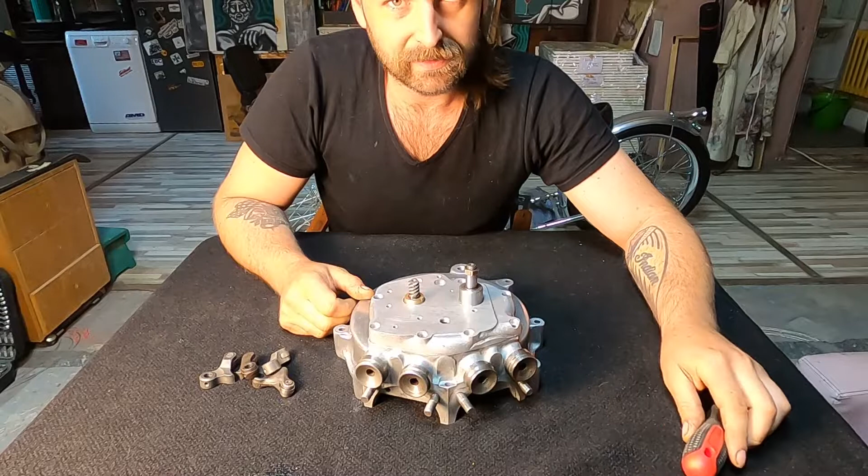Also today I would like to adapt this axle to the newer oil pump. This is for the steel pump. I will have to cut it and make a slot in it, and maybe also drill a ventilation hole, a breather hole in the oil pump. I will time lapse.

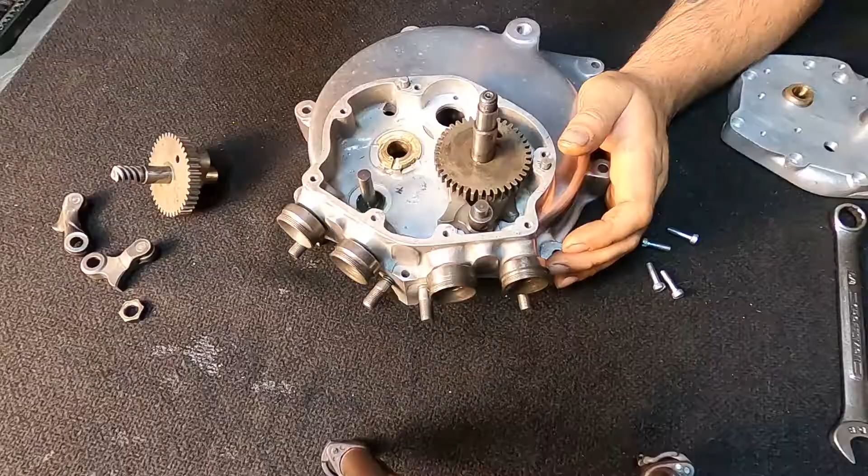So I'm lucky it's only on one side, this problem, so the Bonneville cams are not able to turn the followers. See, they are getting jammed in there, so I will have to roughly grind that out.

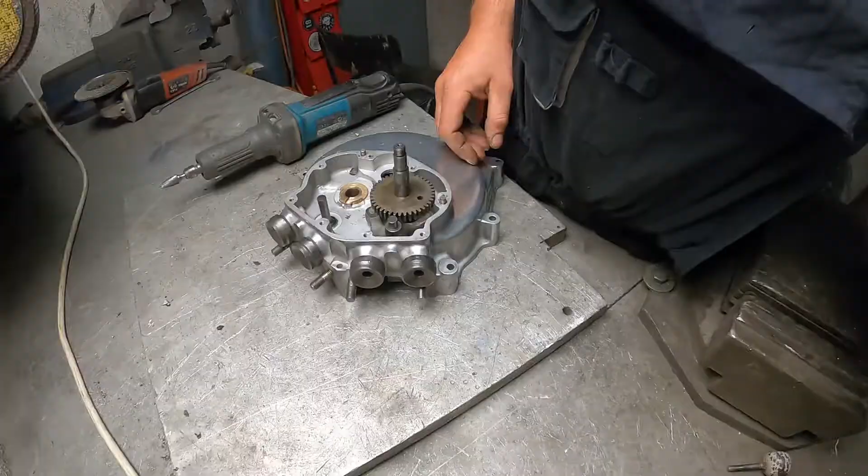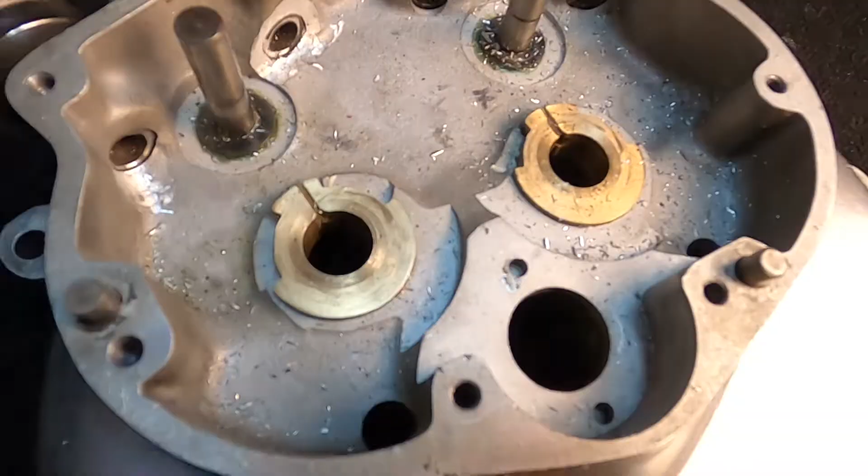Now I'm going to wash the crankcase good and the parts, so I can assemble them.

The valve train is working harmoniously now. Nothing is touching anymore. Maybe I will just take a little bit of extra, so I'm sure nothing will happen, but I will have anyway to finish it up a little bit nicer. I don't like to leave grindings in the crankcase, but for the moment we are good with this.

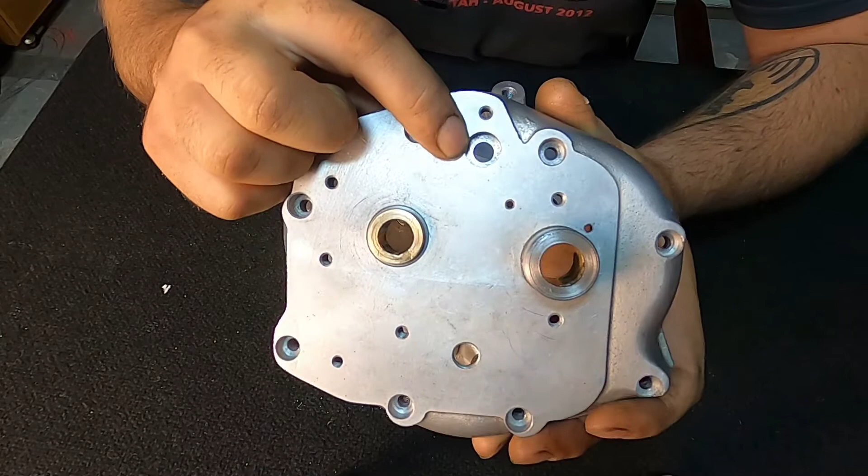I will move on to the other important part. For that I will have to mount the flywheel again to check, because I see this hole is not correct over here, and see what has to be done about it. At least I want to see if it's aligned with the flywheel or not, the little one. If it's not aligned, I will have to make a bushing also, make this one bigger and make them align between themselves. The big hole is for the sealer, oil pressure sealer, and the little hole is for the flywheel shaft to pass. Very important hole for lubing the engine.

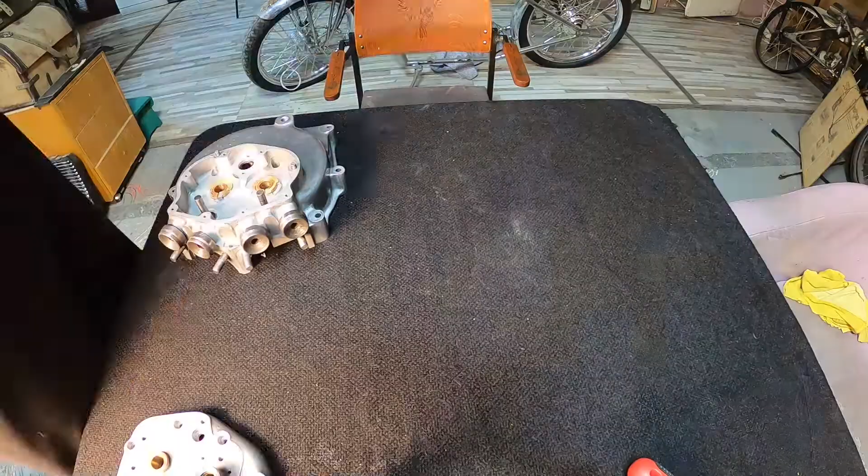So I can check this hole alignment, I have to mount the flywheel in the case, and if I'm here anyway, I want to sort out a little bit the thrust washers for the side spacers of the flywheels. So I will mount the flywheels as correctly as I can in the cases, and then check the timing cover and see where we get.

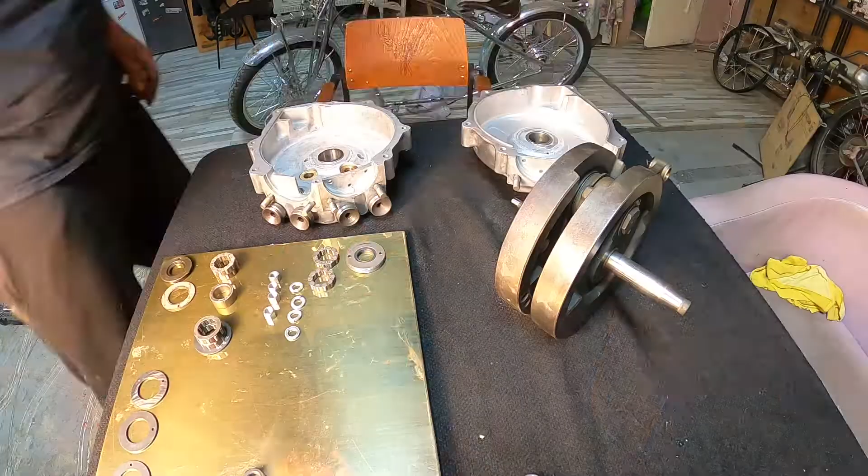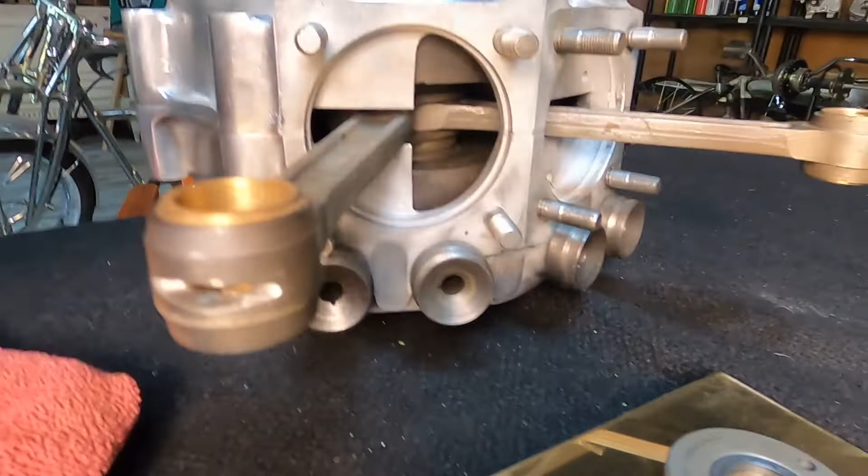When it comes to thrust washers, I prefer not to mount the rollers and first check what I can check, the alignment of the rod in the crankcase. It doesn't seem to be aligned, so it's way to the timing side. I will see if I have a thicker thrust washer and put it there.

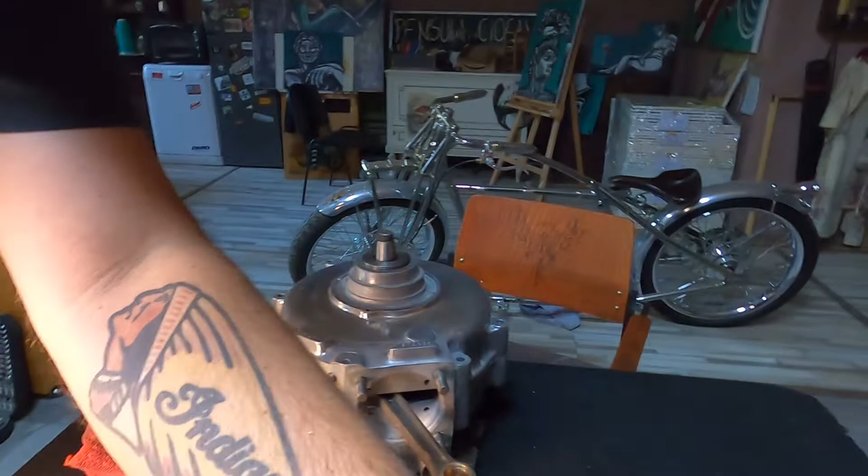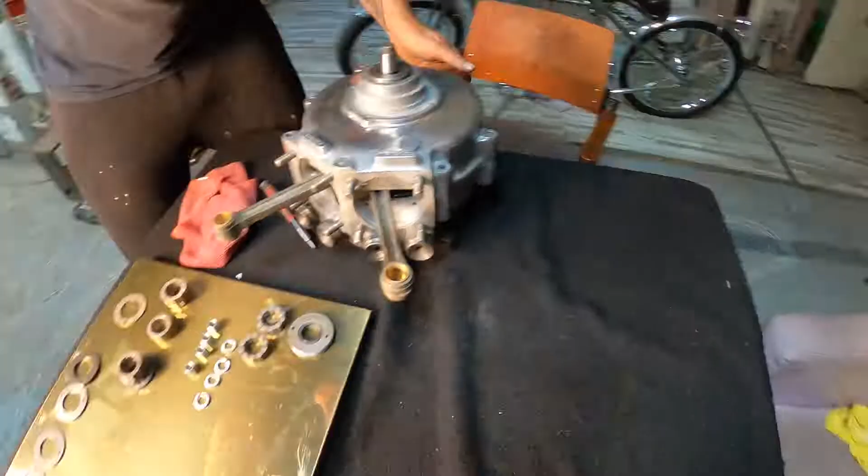I have two types of thrust washers on the timing side. One that is way too thick and the other ones that are way too thin. So what can we do? We take out from the thick one. Now I wanna check how much I have to take out, so I will measure that and see how I will take that out, because they are heat treated.

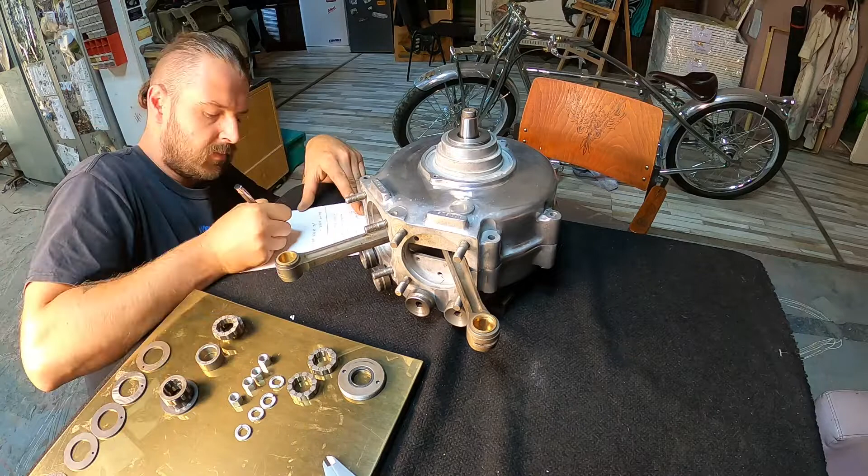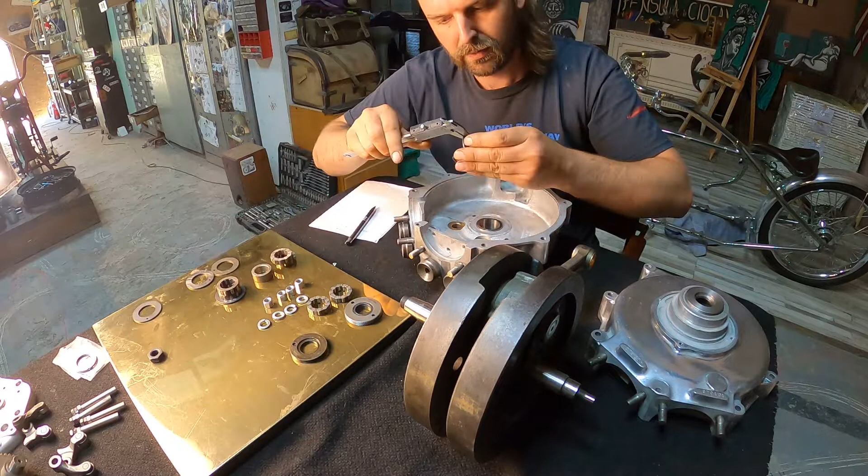So, to determine the exact play I wanna have over there, I was mounting a narrower thrust washer. This is a custom one, I have never seen it before, for the timing side, but it's too thick and I want to know how much to take out of it, because the thickest narrow ones, the stock, will not fit these flywheels. So I chose a middle sized one for the other side. In case I have an error measuring, I can go higher or lower with a little bit.

So now I wanna mount it back together and check without rollers and just check the rough side play that I have.

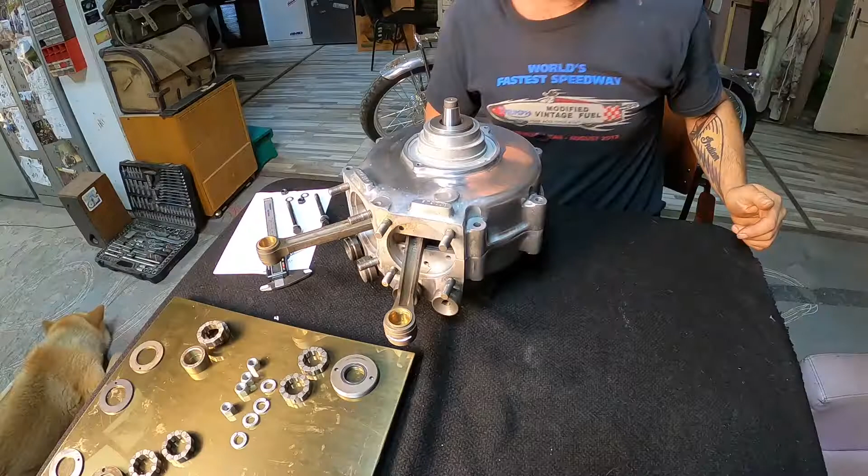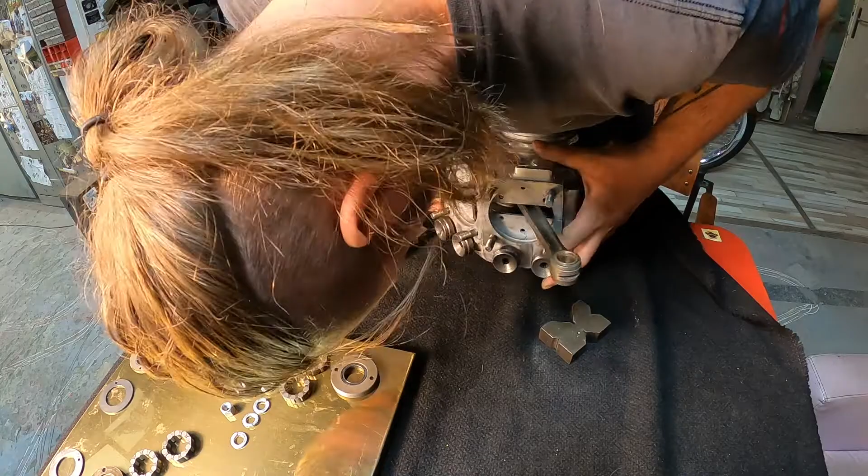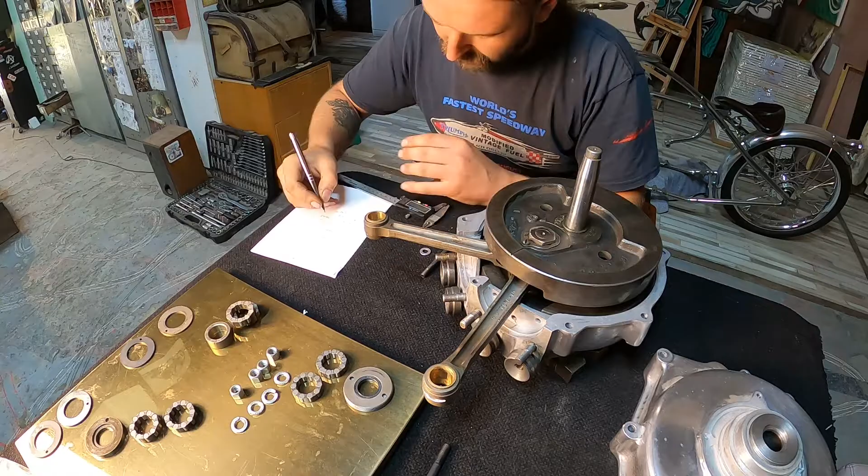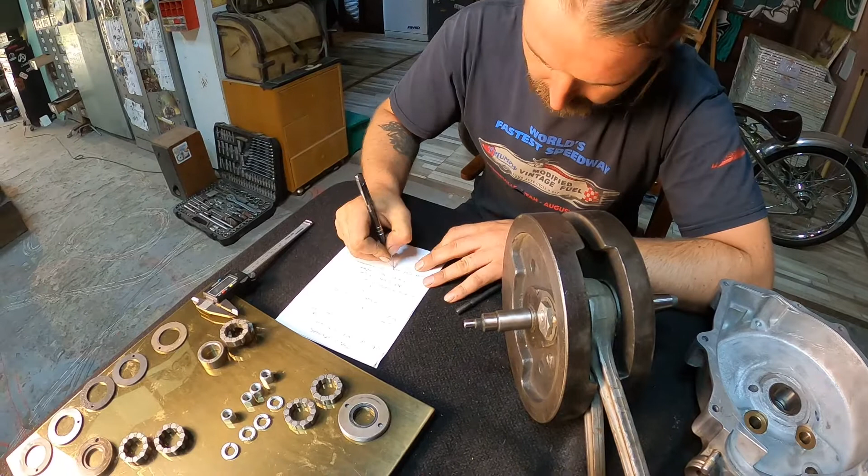I got me a black cat bone, and I got me a mojo too. I got the John the Conqueror, and I'm gonna mess with you. I'm gonna make all you girls lead me by my hand.

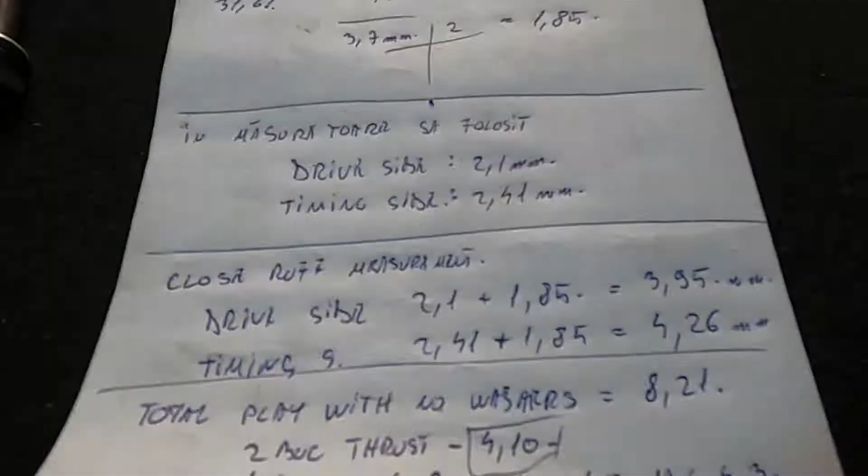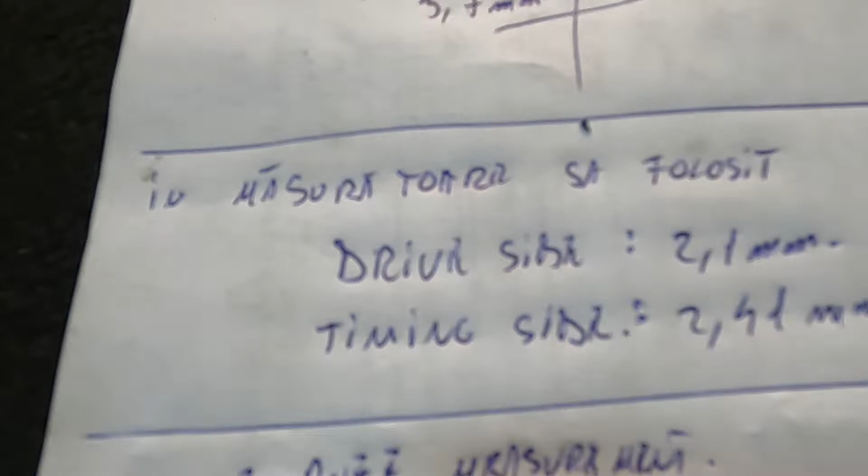So I was first measuring the thrust washer I'm using. I was mounting them without the rollers, so this is just a rough calculation. Then I measured the 3.7 millimeter play with these thrust washers.

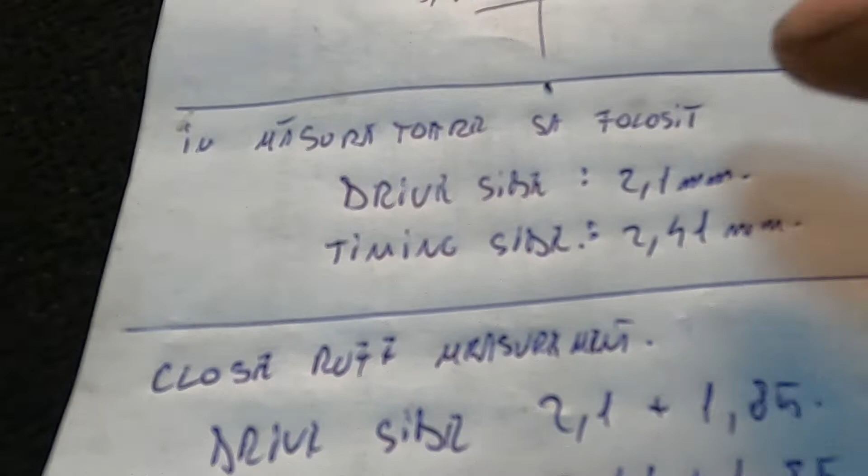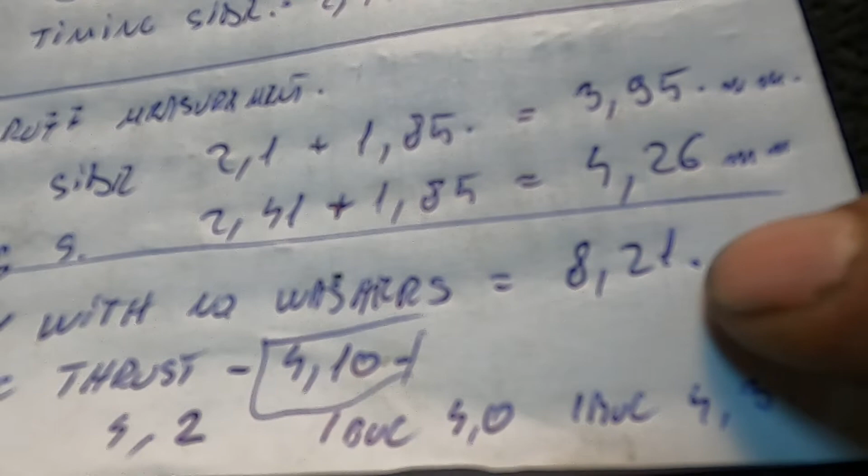So I split this in two and got to this, or you can also add these two together with the play, and we have a total play without washers of 8.21 millimeters. So I made this in half and I got to 4.1 millimeters thrust washers.

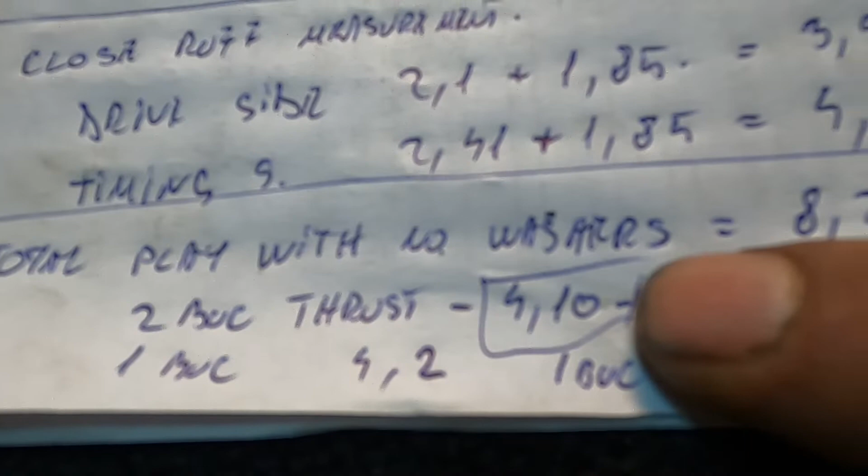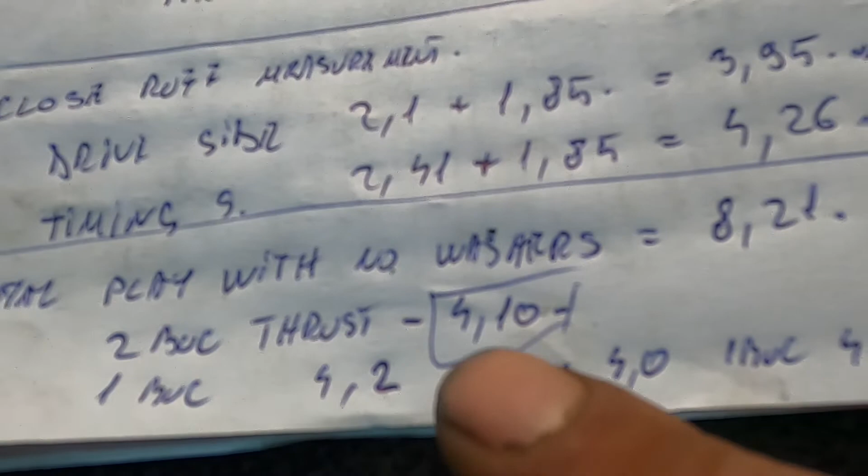Just to be sure, this is just a rough measurement. I will build also 4.2, also 4, also 4.3, and between these tenths of a millimeter I will just use fine sandpaper to take out 100ths or as much as I want to. The important thing is these are custom thrust washers.

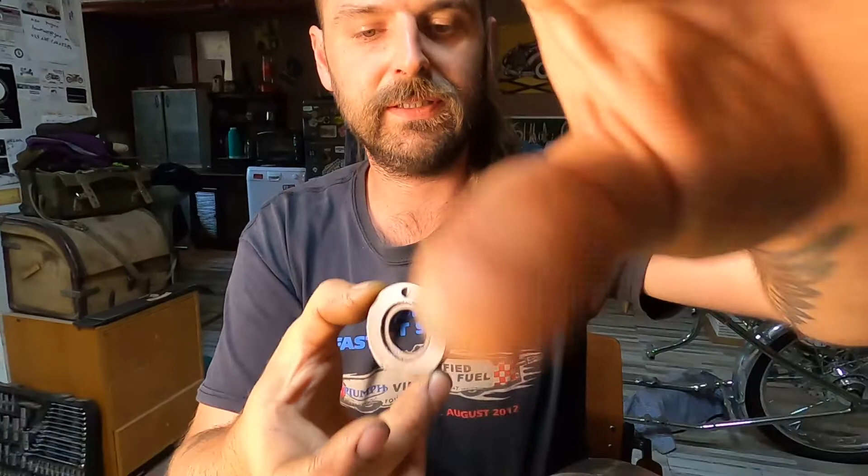They are not available that thick because we are using VL flywheels, so this will be a whole procedure: first turning them on a lathe, then getting them heat treated, then rectified, fine grinding on another machine, and also on a milling machine to create these holes. So it's a lot of work on these thrust washers. I will design them today, make this drawing and sketches, and let them be machined.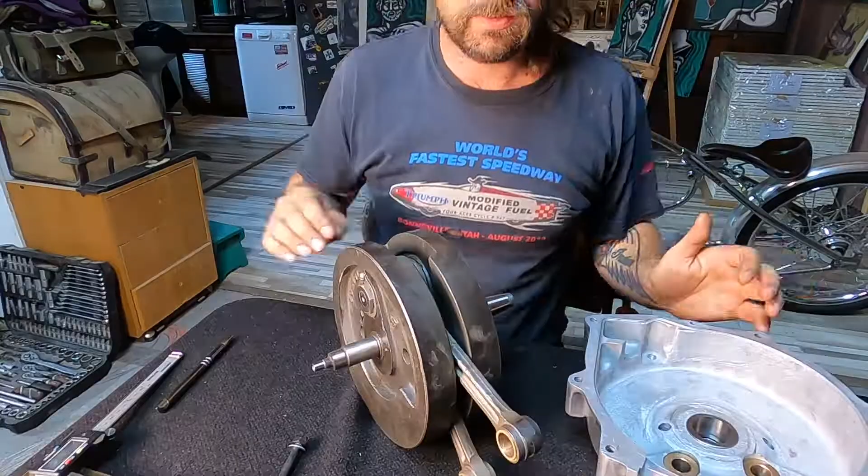The thrust washers don't affect my mounting for checking the timing cover, but since I'm here I'll also make the rough measurements without the rollers. Now I will mount the rollers and use some thrust washers that I have. But meanwhile I can also let the new thrust washers be machined, because I will have other work on this engine. Now I will mount the rollers, put in just some washers that I have, and recheck these measurements with the rollers to see if it's the same, because it's more precise when you have the rollers on.

And let's mount this a bit together.

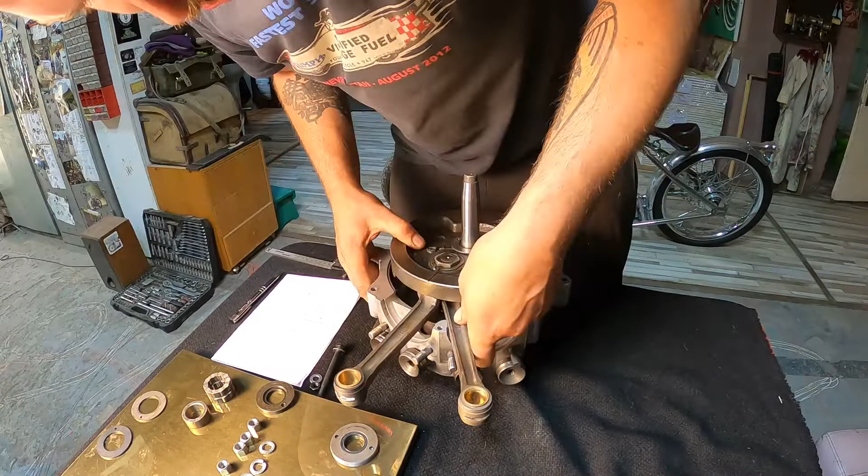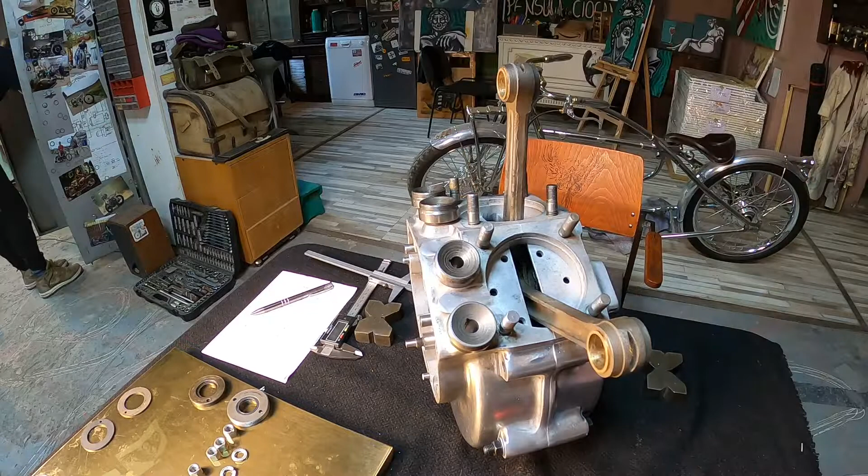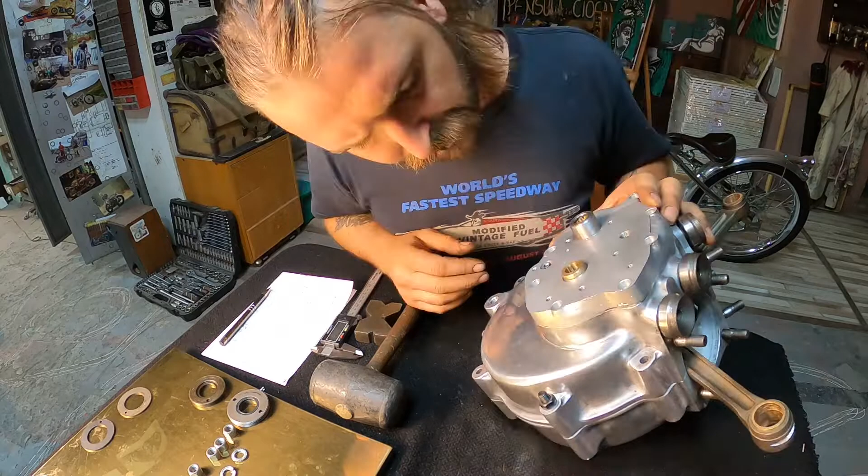Now, exactly as I could see with my free eye, you can see on one side it's almost there, and on the other side it's not. So the whole machinery hole in this cover was not centered correctly.

Now I have to think about this. I don't know if you can see with the light, maybe now it's better. This is one side, this is the other side. So anyway, the inside hole, the little one, is not centered correctly, and the outside hole that should hold the seal is also not on the same line with the little hole. So I have to think how I will manage to align these holes.

So when I was just checking for the rotation, I could see another thing: this is a metal part, so the thread of this shaft is also touching the surface here. So it is also not correct how the cover was machined for the side play against this nut over here. I will also have to measure that and see how I can fix that on the timing cover.

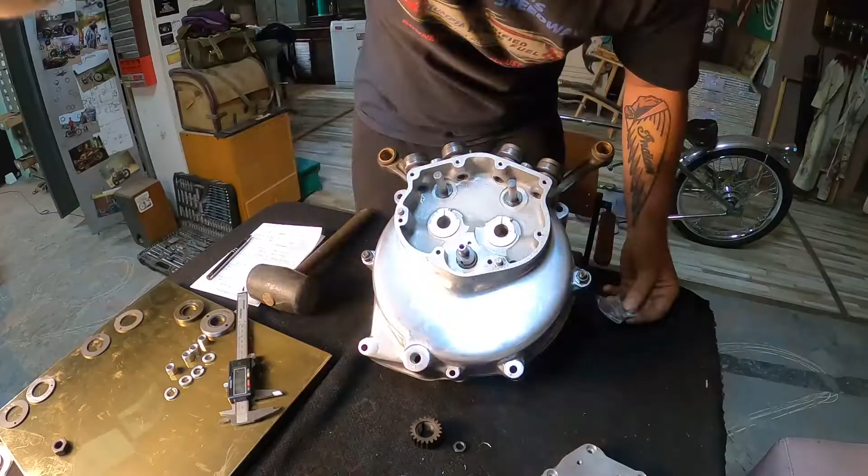We have three things that were made wrong on this cover, just on this hole. First of all, the little hole is not aligned with the flywheel shaft. Then the second hole is not aligned with the first hole, and then the side play here is not correct, but it's not a problem of 0.10, it's a problem of 3 millimeters that I have to take out of here.

I was checking, I have 4 millimeters, so I can take out maybe 3 millimeters and still have a surface over there for the bushing to stop.

And now I'm thinking how to center this again on the engine case, mount this cover, go to the machinist and make a new hole over here.

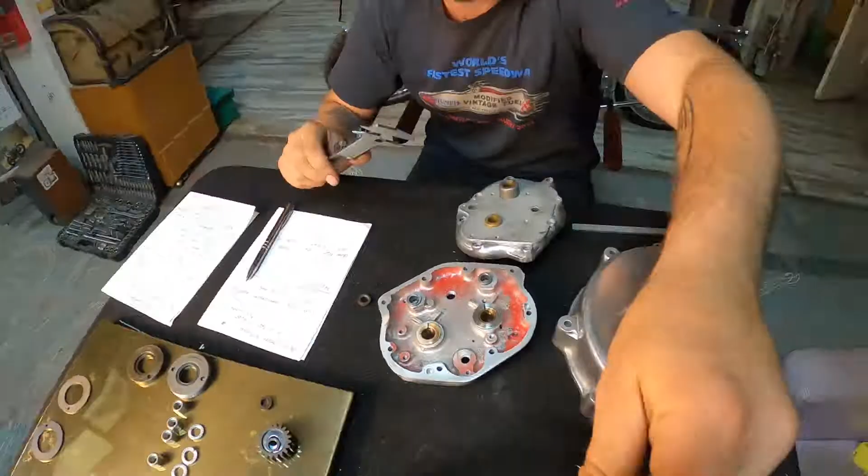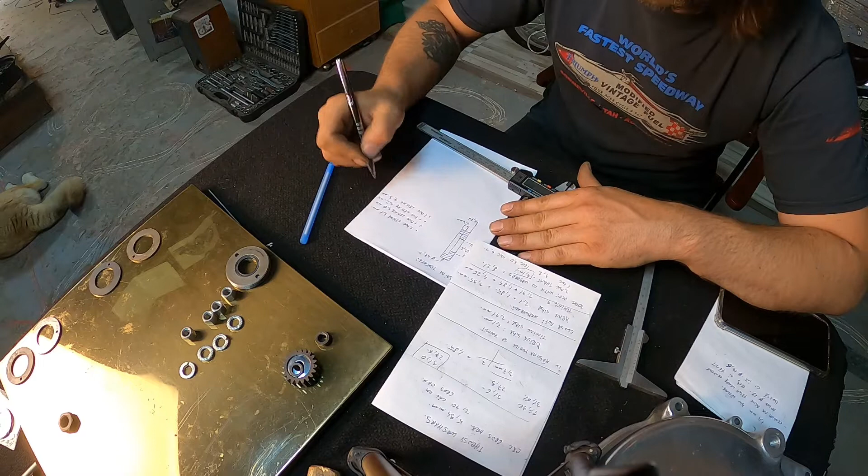So I sorted out what has to be machined on the cover again. I'm at 40 working hours on the cover and it continues. That's one thing, and another thing, so people can get it.

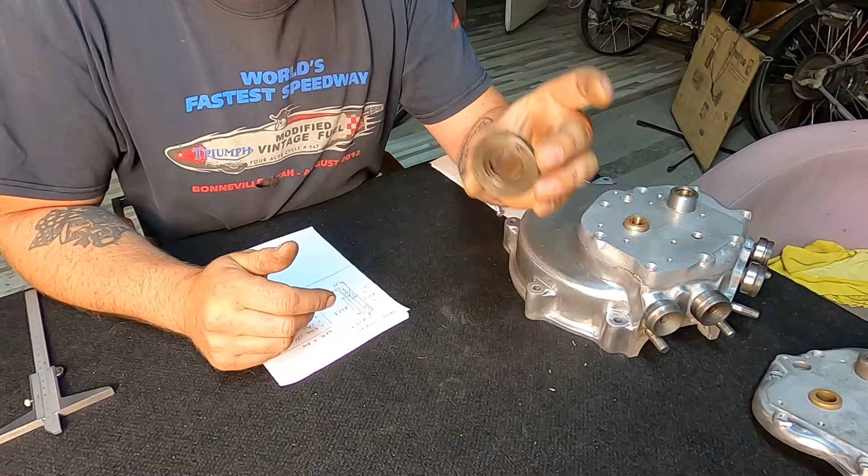When you need a special thrust washer, I don't know what other people do, but I first have to make a sketch of it, then choose more dimensions, so I'm sure I will get somewhere, because I would have to make 6 trips with my car, bicycle, or bus just to get one thrust washer like this done.

One trip to leave the machinist on the lathe this sketch, then I take it from him. Today I leave it, tomorrow I take it back, 2 trips, then I go to the milling machine guy, leave it there for these holes that have to be planed in the back, take it back, 4 trips. After I have it back, I check it on the engine, take it to heat treatment. When I get it back from heat treatment, I have to rectify it.

So by the book it should be 8 trips, also to the other machinist for the fine grinding to grind this. But I will do that by hand, probably 1 or 2 hours of sanding to get to the correct points. But first I will start with letting it be machined by my machinist.

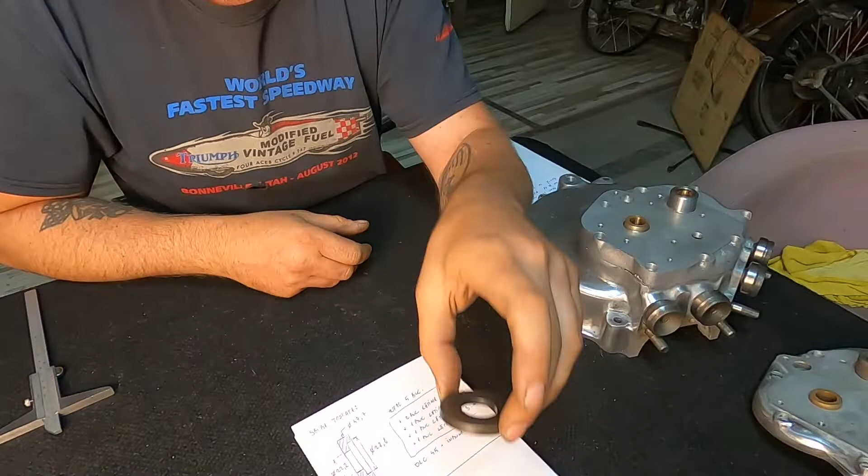So that's it for today. I will take my bicycle and leave these to be machined. The thrust washers are in production as we speak. It will be a lot of handwork to make those fit.

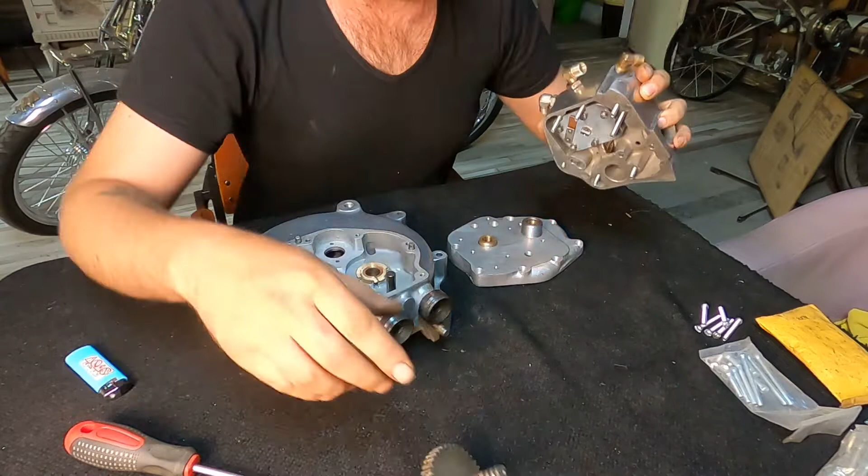So I got home and said, okay, today I will modify this axle to fit the newer oil pump. I was mounting the oil pump on, I will show you, and I was very disappointed.

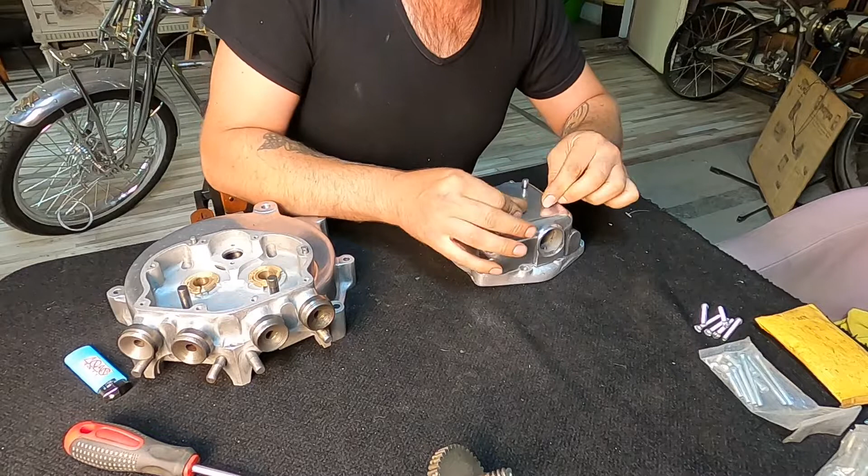Not all screws are in the correct position. That I could manage somehow, because I could make the holes a bit larger. But guess what? When I turned around the pump, the axle is also not aligned on the center of this axle. If this had been cut and mounted correctly, it would have just broken the pump or the cover here, because it's a big alignment difference, around 2 millimeters.

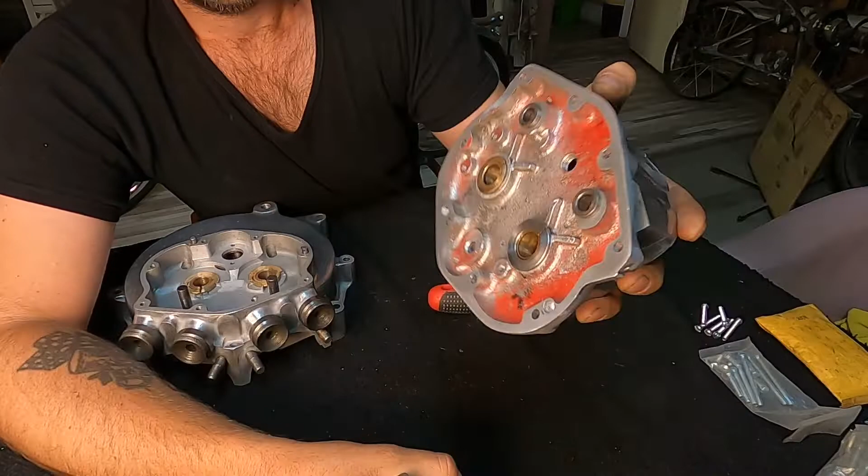At this point I was talking to the owner of the bike and asked him if he's sure he wants to continue machining on this cover.

Normally I should now take out the oil pump, weld all mounting holes 1 through 7, make bigger holes, fill them with welding, press out all bushings so I can re-plane this part, and I don't think that will happen. Really, it's way too much handwork, and I don't think it's worth it, because in the end you will still end up with a repaired cover in many places, in all places actually.

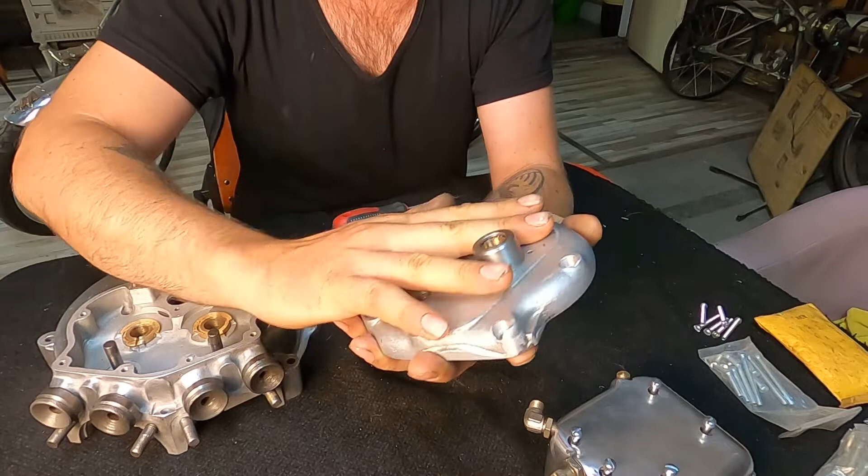So you can also see how the screws are going into the cover, so the whole alignment of the pump is wrong. This has to be welded, bushings all pressed out, destroying again the nice seating in the cover.

So I guess we just have to wait for another cover like this and stop this project for the moment. I will finish up the thrust washers on the flywheel, and we will either continue with the steel pump and not adapt the aluminum pump anymore until he finds a correctly matching cam cover, or we will just continue repairing this one.

What I wouldn't advise, it's a lot of work that doesn't make sense in my opinion. It's better to have it produced correctly from the start and just mount it on.